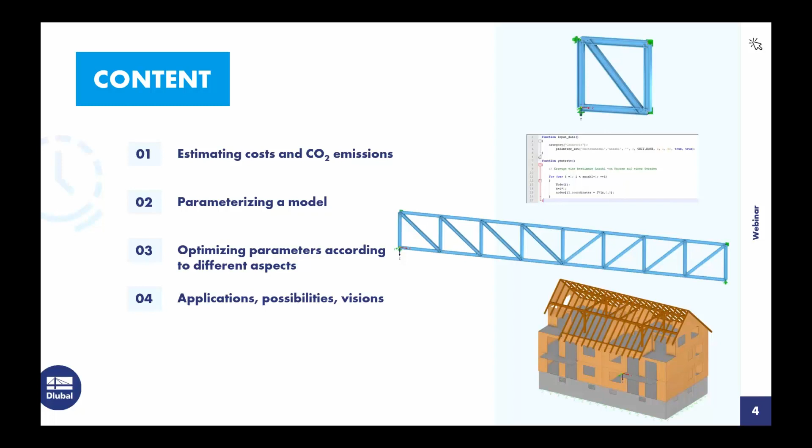And finally, we take a look at these cost estimations and CO2 emissions on a typical user structure, something like this apartment building structure here. So this is now the sign for me to change to the program, because I want to show you this live today. So I close this window and jump into RFEM, our new generation program.

And here, before we start with optimization and so on, we have to define a new model first. For this, I define a name, for example PO1, and specify my tasks. And when I speak about essential tasks, I always change into this register, add-ons. This register shows you all our add-ons available in the program: designs, analysis add-ons, special solutions, and here our focus add-on today, optimization and cost, CO2 emission estimation.

I agree, a quite complex name, but it should show you what it can do. And it also has a special place in this menu, because it's not allocated to special solutions or analysis add-ons. It's in the lower right corner to show you that it globally covers the design add-ons, but also the other add-ons. So it's lying like a skin over everything, because if you want to optimize something, you have to consider nonlinear material and also designs.

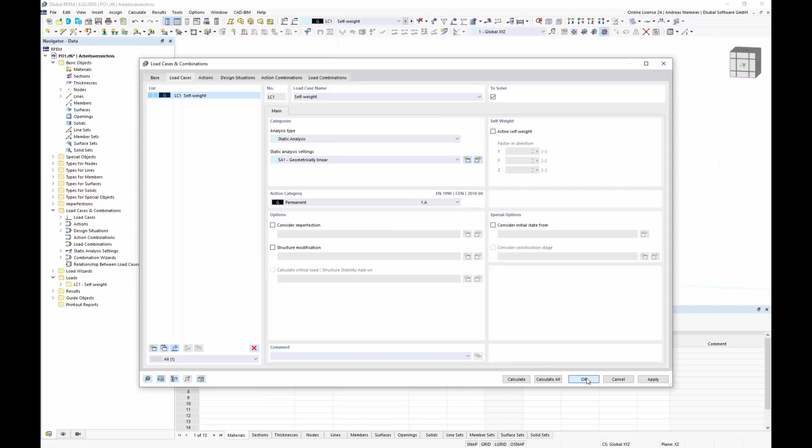And of course, at the moment I don't define here any element. There is no surface, no member, but I want to show you first which boundary conditions we have. So this means I want to load this element with a typical load, let's say with a unit load here. So no self-weight. I apply here only a nodal load, for example 100 kilonewtons, and this 100 kilonewtons should be carried from this element to 2 nodal supports on the left side.

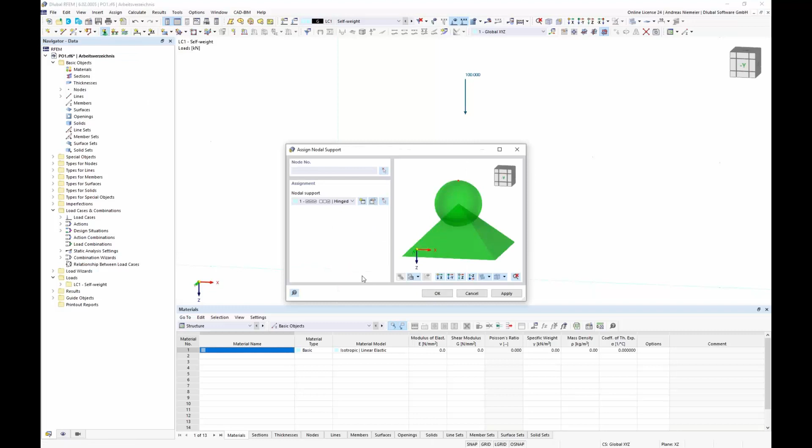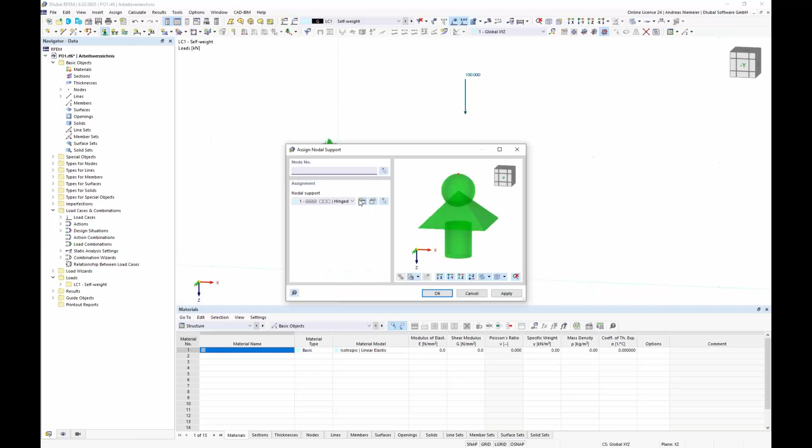So here the nodal support is on the bottom corner, a translational support in all directions, and on the upper side we make also a new nodal support, but without having any constraints, so I place it here. And so that this structure cannot rotate around the global z-axis, I place also here 2 supports in y direction. So these are my boundary conditions and should show you my target place where I want to operate now.

So if you see this load and you see these supports, our task is how we can carry this force down to these supports. I can create here now, for example, a wall or a member cell or a mixture of both or a solid. So everything is possible. But for explanation today, I use simple members.

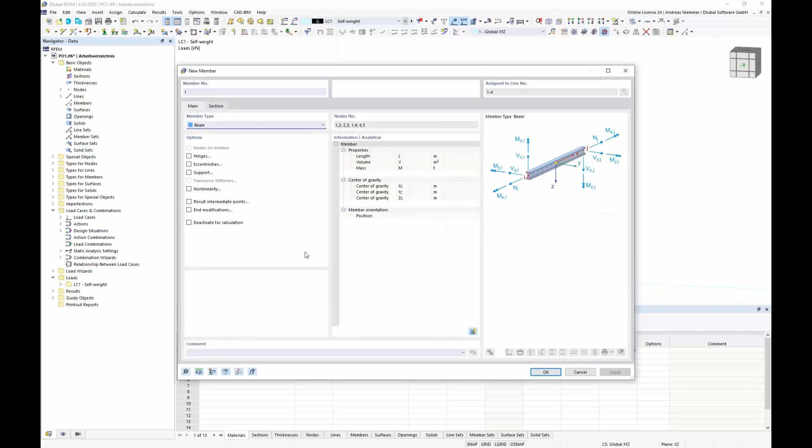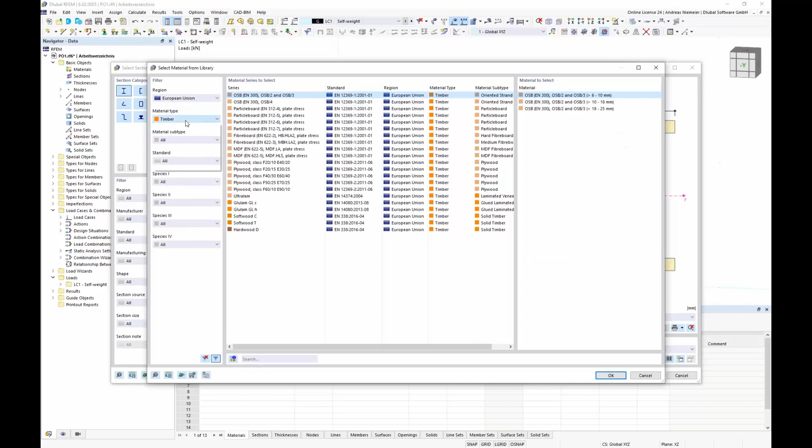So I select all 4 lines and assign a member here. So go to options, member, take here the member type beam and assign here a cross section. For such examples I always use my favorite cross section, an HEA 100, of course with writing a space here, and I select it here with a standard steel, so steel S235. So okay, after confirmation we get now these 4 HEA members.

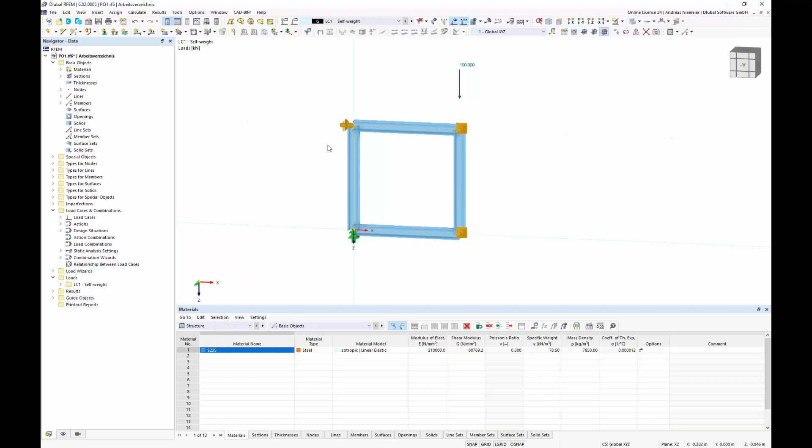They are connected rigidly, but this plays no bigger role here. It's only a structure that can carry the force down to the supports. This we can also check. So if I run the static analysis, you will see that we get here, of course, deflection. So we have here 14 millimeters deflection, and of course we get here internal forces, normal axial forces, here tension, here compression, and even bending. So we can realize that this shear is transported via bending to the supports and produces here reactions.

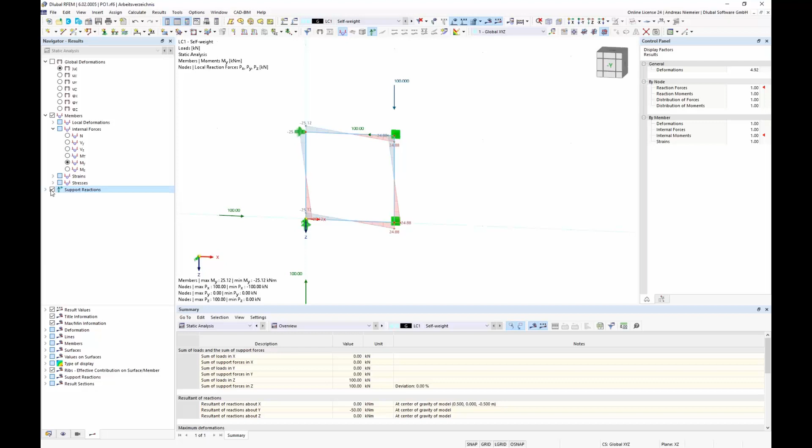So far everything is as expected, but as structural engineers, if you see this structure and even if you see this deflection shape, you would say, yes, nice structure, but we need a bracing in it. And I agree. I would also model here a bracing, but I don't want to tell the computer now what is the perfect place of the bracing. I expect from the computer that it will tell me what is the perfect place of the bracing, and therefore I say here now, please have here a bracing in the middle.

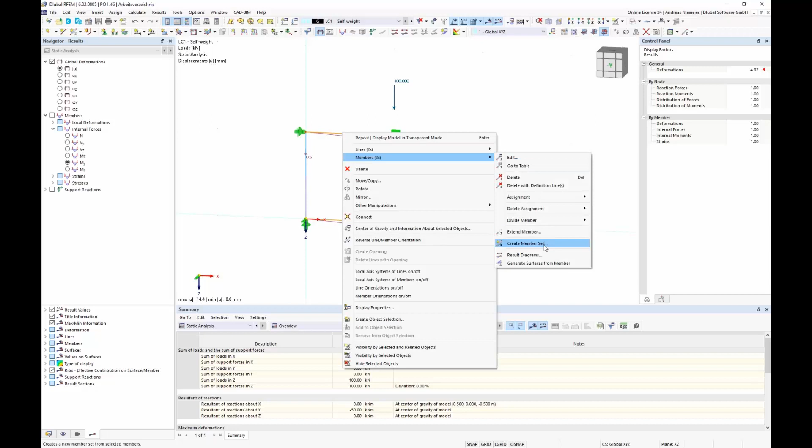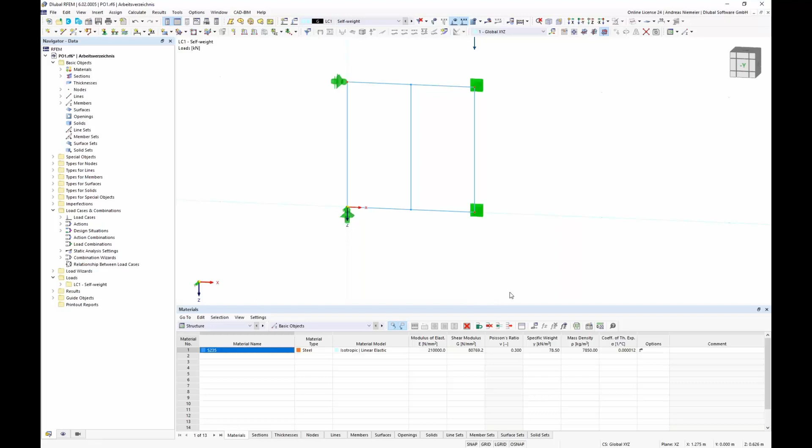So I divide the member with intermediate nodes, create here a middle node by placing the node on the member, and then I take here one leg and copy it here in the middle. So far we have now a bracing. I don't want to say now if the place or orientation is good. It's only a, let's say, stupid bracing.

And if we run the analysis again, we will see, of course, this bracing increases the stiffness, and we could reduce the deflection to, let's say, 8 millimeters, but the deflection shape is still the same, and we can think about the orientation or inclination of the bracing. And I would say now this is a job for RFEM, for the computer itself, so that RFEM can find a right place for this bracing.

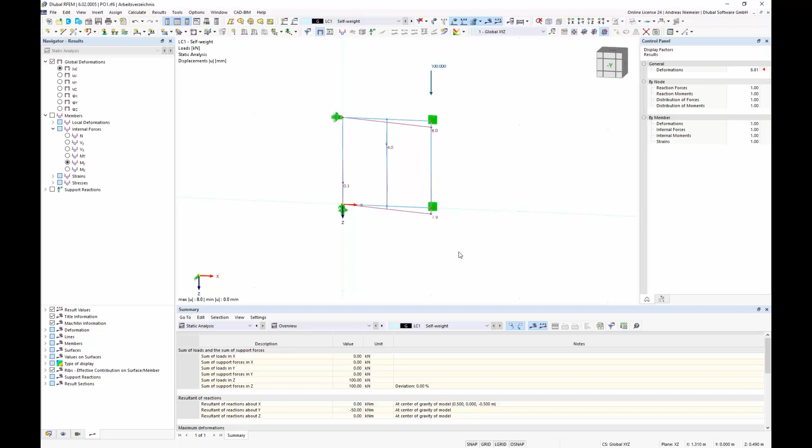We have to give the computer the information what it can change to find the right place. And here it's clear for us we can maybe move this node in the left direction or right direction here, and even here move the node in the left or right direction.

And if we define this variability, RFEM has an option to find this place. So first we have to specify this variability to start this searching process. And maybe you noticed it when I divided this member.

You see we have here red nodes, and we have here blue nodes. This blue node is a special node. It is a node on member and gets its place according to a distance from member start and end, but lying always on the member. So it means if I change here from 0.6 to 0.7 or the distance, the node will move. And this is exactly what we want.

And for this, I define two parameters. I go here to Edit, Global Parameters, and here I have a parameter list that I can specify, and I say the first parameter is x top, and the second is x bottom. The parameter gets the unit type length with, in this case, 0. Of course, I can write a value here, but I want to have 0.

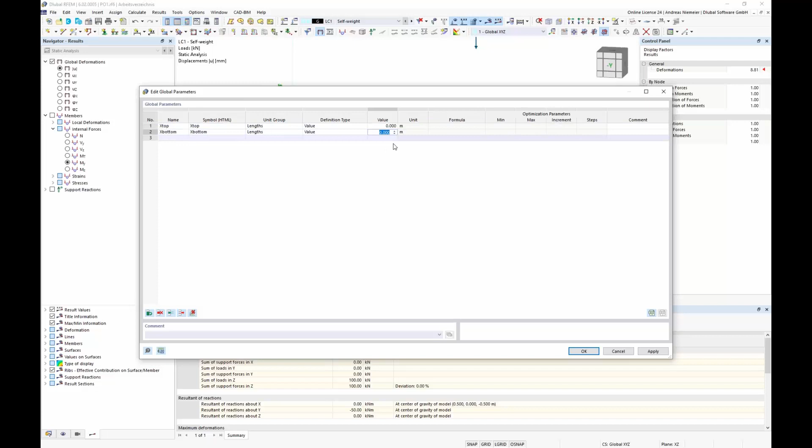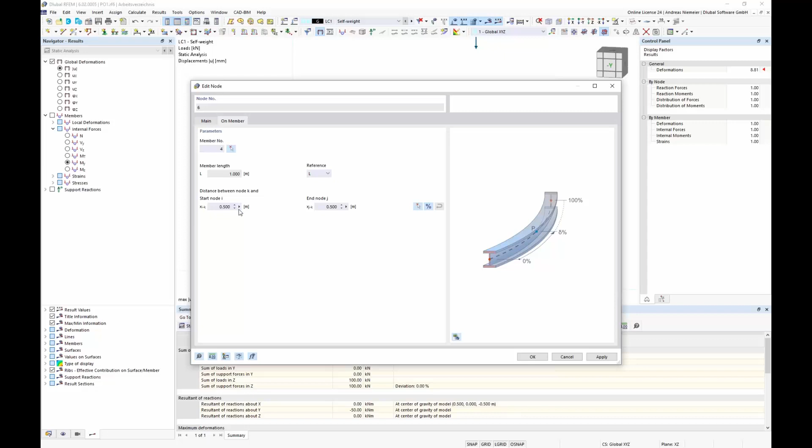And now I use this length parameter to move this node. For this, you go into the node properties, change here to length definition, go to this black triangle and open this formula editor. You have a big white box where you can write a lot, but we can say here 0.5 meter plus x top. And you see the program directly calculates the result. It's 0.5 because x top is 0.

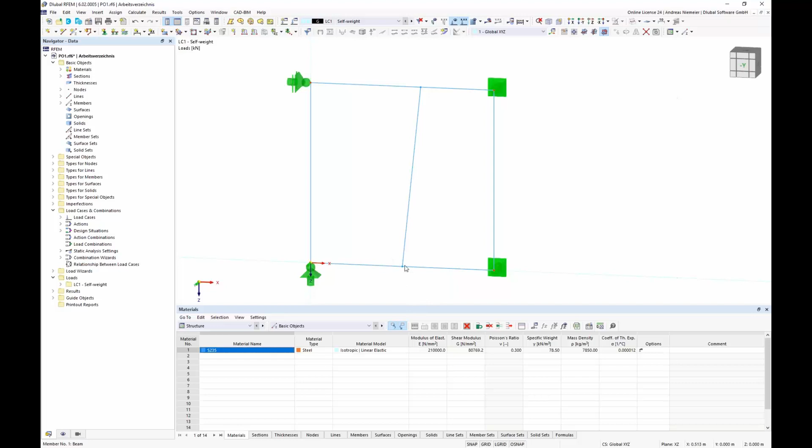But when we go now into this parameter list and change this parameter to 0.1, you will see that the program is moving this node. So we connected now the geometry to this parameter. The same we can do for the bottom. Here I want to go one step further. We wrote in this formula editor 0.5 as a fixed value.

But what happens if you move this node and it's not 0.5 but something else? To cover this, you can go into the node details, change it to length as before, and open it again. Maybe you realized we have two buttons here. The button with the i is an information button which gives you a command list you can use to connect to properties of the program inputs. This is JavaScript style and allows you to connect to every element of the program by JavaScript code.

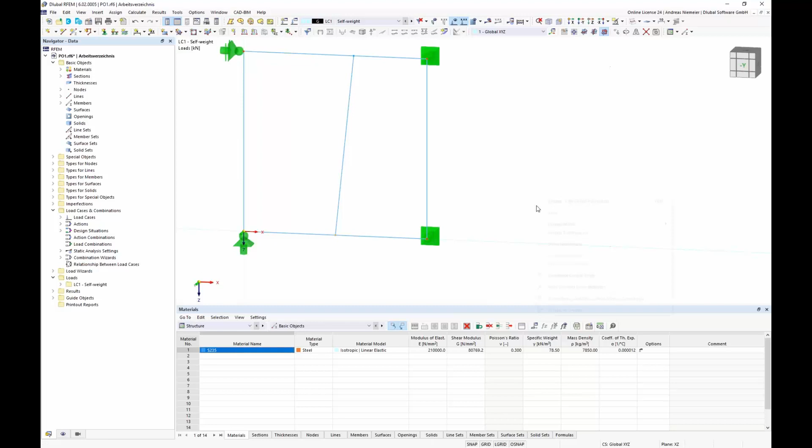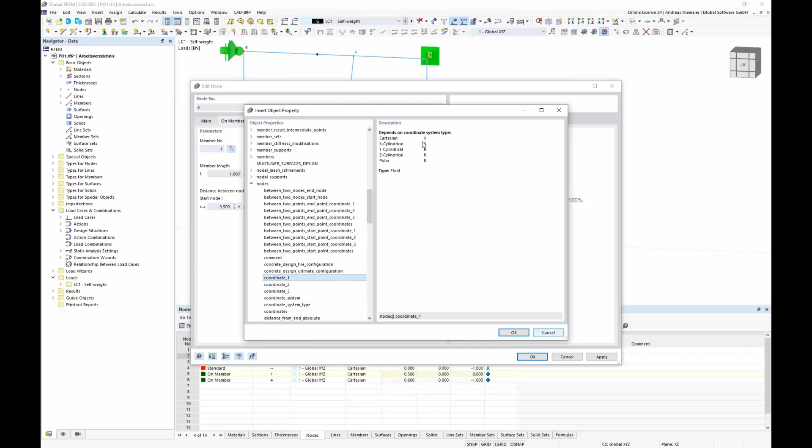For example, if we want to connect to the coordinates of node number 2, we can go again into this node property, meter, formula editor, and type n, nodes, and you get commands that touch the node, and for coordinate x you can connect to the x coordinate. If you confirm this command and write node 2, you get the value 1, which is written in the table, and you can divide this by 2, then we have a half meter plus x bottom.

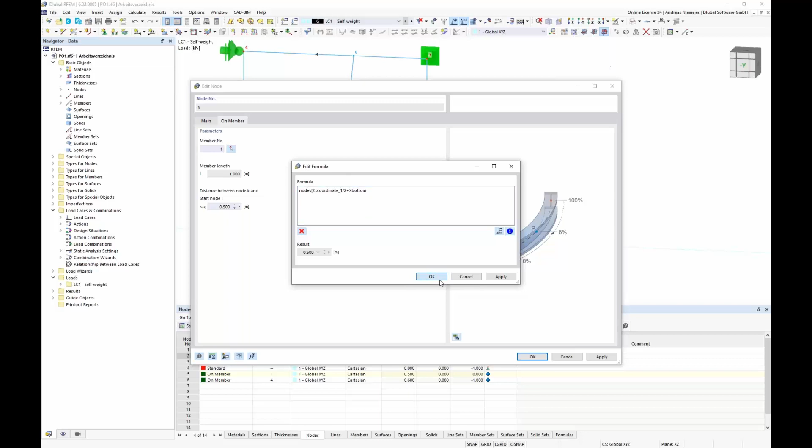So you can write your own code to work with values of the input data itself, which enables you to make a good parametrization of your model. Now we have an option to change this bracing member in both directions by typing in these values. Of course, this is not the optimal place. It's much more optimal when we move it completely to the right and left side. But this is the task of the computer later.

So now we have done this parametrization, but the question remains how the optimization can work with these parameters. The optimization we activated in the base data enables, below Calculate, the optimization settings menu. You see a few options and values to optimize. Unfortunately, this list is empty, because we have to declare which variables of the global parameters should be optimized.

For this, if you open the scheme again, you will see below the column definition type a few options. We have values, formulas, optimization, and some special types of optimization. If you give these parameters the type optimization, you will see it goes red. This means something is missing.

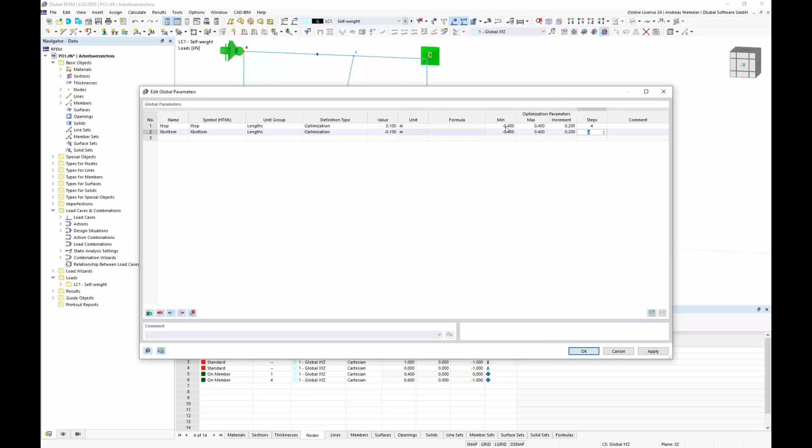And if we confirm this, and let's say we start here from 0, like in the beginning, and open here calculate optimization settings, you will see you get now these 2 optimization parameters available to optimize. Because we have these 4 steps, it finally ends in 5 states, and because we have 2 variables, it ends up into 25 different, let's say we call it mutations.

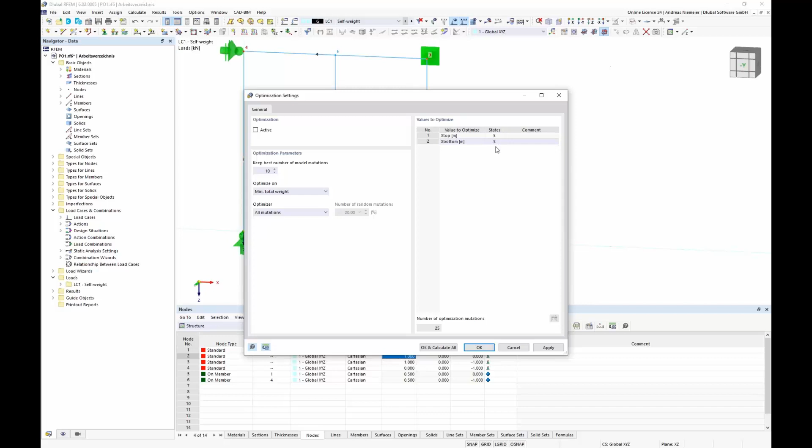Mutations means the value could have the first and here's the second state, or the third and the fifth state. So there exist 25 different situations, what means for us 25 different models where we have different geometries in this case. And we defined here the name mutations for these different models.

And now if we want to find the best solution, let's say best in brackets, we can maybe activate it here with this check, and you get 3 options to specify. The program asks us keep best numbers of model mutations, and here is written in standard 10. The question is best models. Of course, here we speak about 25, so it's not so crucial.

But you can also work with 1 million, then you don't want to read 1 million. So it's interesting only to store the best 10 results. But for our upcoming analysis, 25, we can write all, only to understand what happens. Then, because the word best cries to the question, what is the best? And here we have to specify below the chapter optimize on when the program is changing these variables.

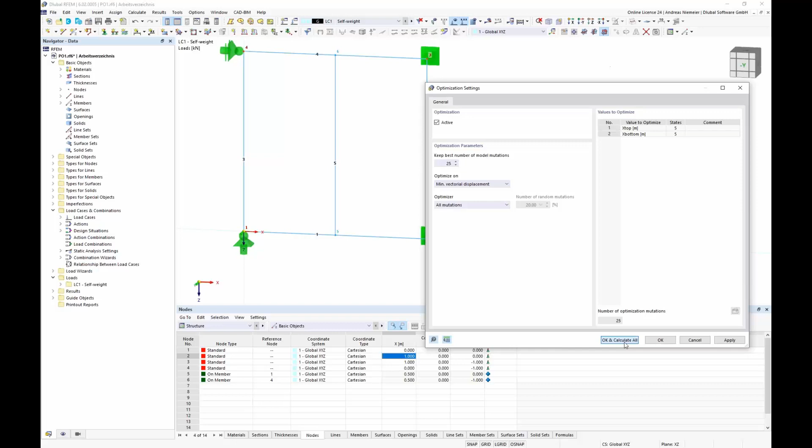And if we do this, and start here OK and calculate all, the program is opening a calculation process, but it's looking a little bit different. It's more an optimization process where you see which optimizations are done. And in background you see what is changing. Yeah, he calculates the different mutations, and even if he finished the calculation of one mutation, he logs it down in the table connected to these 10 best results, for example.

Now we log down the 25 best results, and you see you have here measured the vectorial displacement and the corresponding parameter set. The best vectorial displacement, for example, here happened now with the solution number 5 if he moves the top node 0.4 meters right and the bottom minus 0.4 meters left. So this is, let's say, our expected place, what is really good. All others are not so good, so you see we get here bigger deflections. But of course it's a stupid process because he calculates all available.

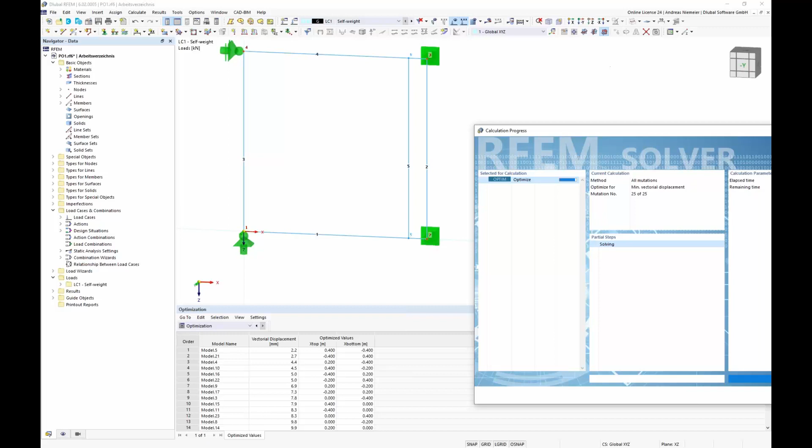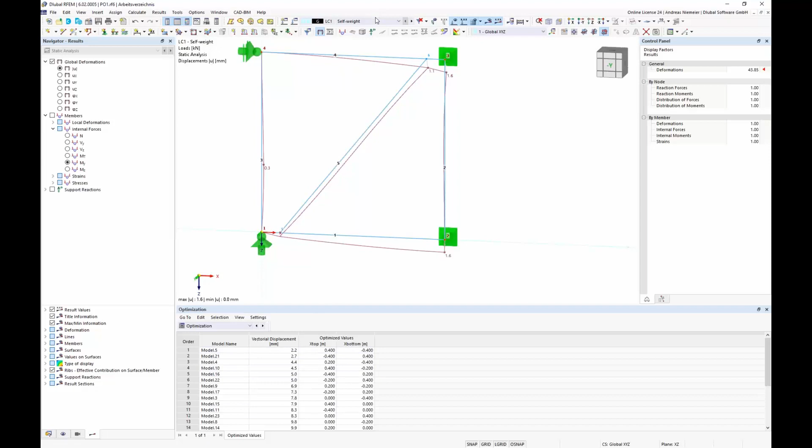use all values. And what I want to present to you with this step now is that you have to wait for at least the calculation of 25 models to get a result, to find out that maybe model 5 with this parameter layout gives the best result. We have here 2.2 millimeters, but this is only coming because the program is directly considering this design situation with increased values, where he has this, let's say, partial safety factor, because when we calculate this, you get exactly this 2.2 millimeters.

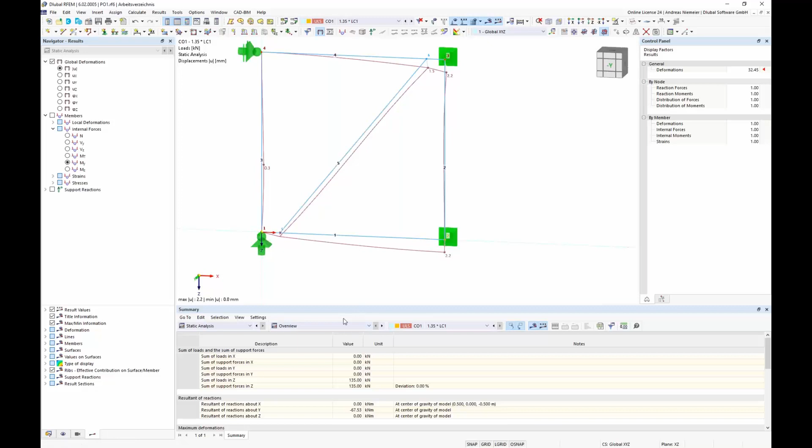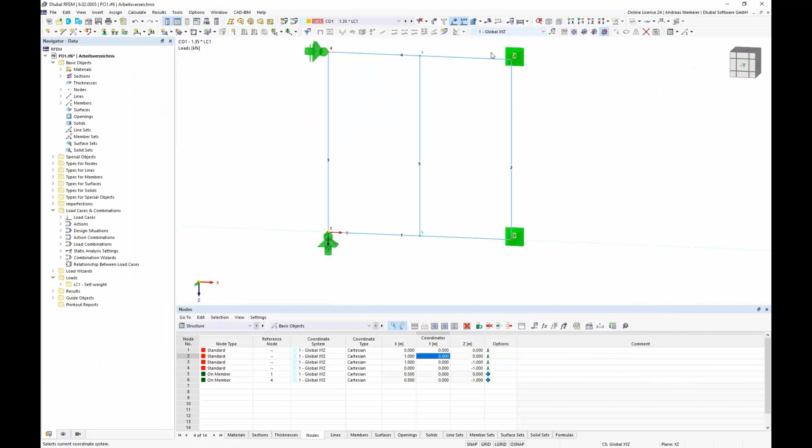So now, the question arises, can we do this faster? And yes, we can do this. So we set this structure back to its original place. So this is the best parameter set he found. But we ask the program again to find this solution much faster with a learning process.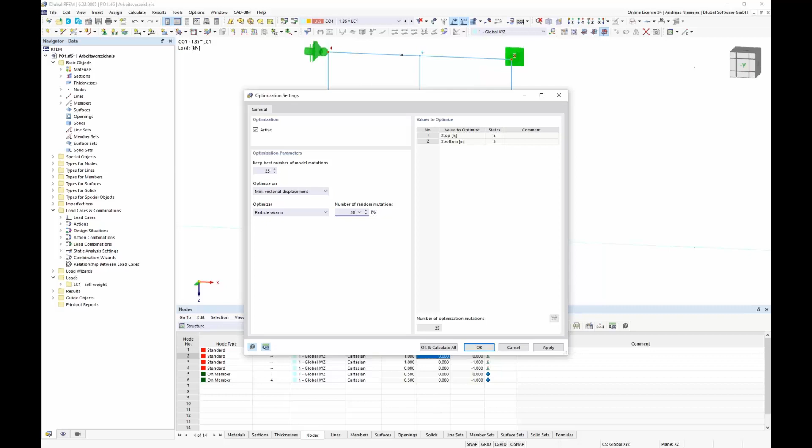And here we go back to this menu, optimization settings, activate it again, and say now, please use as optimizer this particle swarm algorithm, which is, let's say, a learning process using only a fraction of all possible variants or mutations. So I say, as a basic input, for example 30%, which means 7 elements of all, and the task is now to find a good result within the calculation of 7 mutations. And for this, I start the process now.

For this, he has to start with a random selection of, let's say, parameters, do its calculation and realize, okay, my first calculation gives a not so good result. Then he tries to find a better parameter set by knowing what gave him a bad result and finding a better deflection until, let's say, 7 mutations are over. So his game is to find a good solution within the 7 solutions.

And you see now the program was able, by using this self-learning process, to find within the calculation of 7 models a really good solution. Maybe here he already found the best solution, but this is not a must-have. The point is more to find as good a solution as possible, but you can save time with this process because he learns, maybe when he first starts with such a solution, that he has to change the parameter to get a smaller solution, and then he can learn not to increase the value in this direction but rather to increase it in this direction.

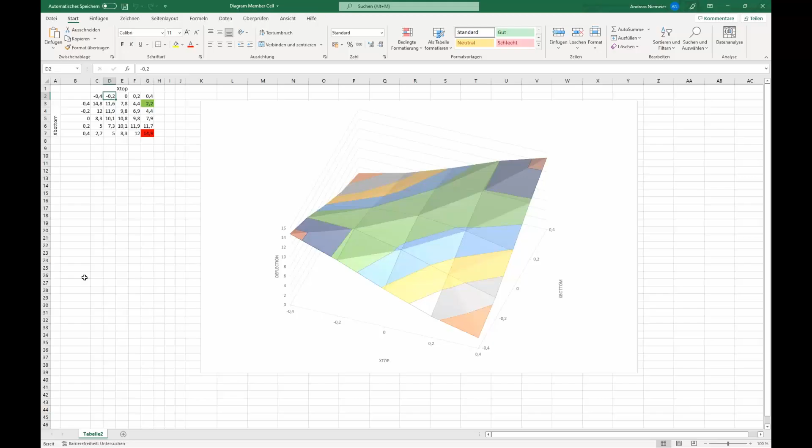And because these swarms have a need to rest, maybe in reality, and the closer they come to the resting place, the more the need increases, mimicking this behavior helps to find these optimums here in this corner or this corner. So maybe we could prove this a little bit with this short introduction.

And now I want to open this topic by mentioning what we can use this for, because if you take a look at this cell, it's part of a truss girder, for example. And now the question could arise, if I think of my life as a civil engineer, if you try to use a truss girder for supporting some loads, maybe the question appears, how many cells should I have? Do I need 10, 20? I don't know. Then I can change the height of the truss girder. It's also unclear, and even the cross section, for example.

What is always static or fixed is the length and the load. I cannot change those so easily, but what I can change is maybe the geometry of the truss girder. But if you take a look at this current parametrization, you will see, yeah, nice, of course I can use it for truss girders, but this technology only allows me to change the length and not the number of elements. And I agree, this is not possible here, and this is maybe the stuff of our old generation, RFEM 5. But with RFEM 6, we got a new mighty

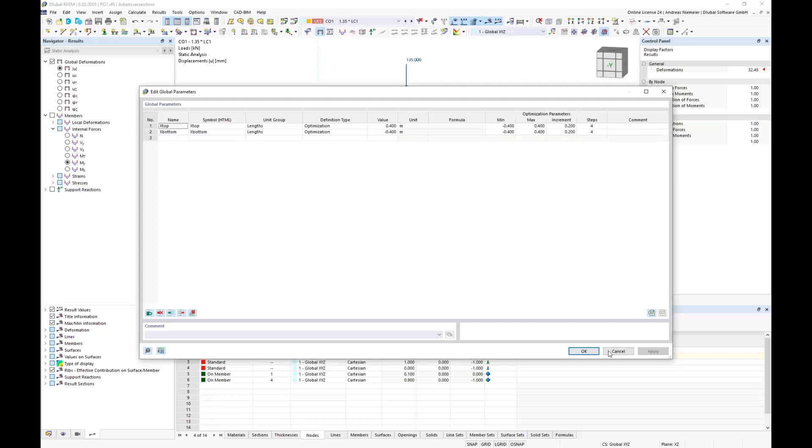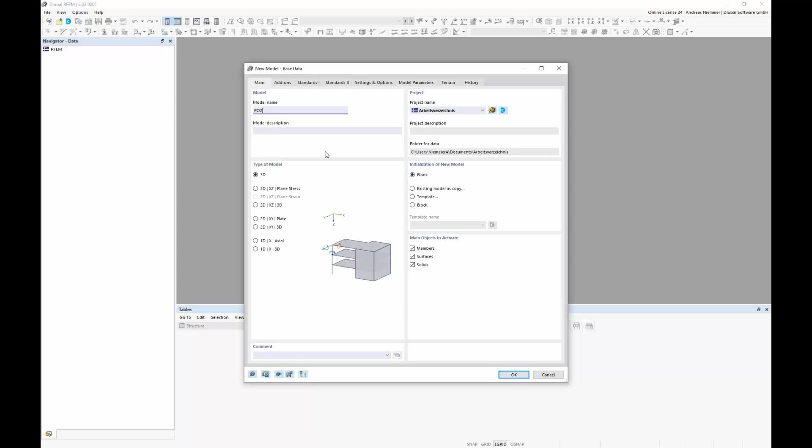We got this, let's say, JavaScript technology, what I just showed you before, where I can write per code elements. And I want to open this case here by opening a new model where we create, maybe here PO2, or not a truss girder, but more, I want to show you how you can create new elements by a parameter, which represents our task for a truss girder, because in a truss girder you also have to say I need 5 cells, 10 cells, which means more members or less members.

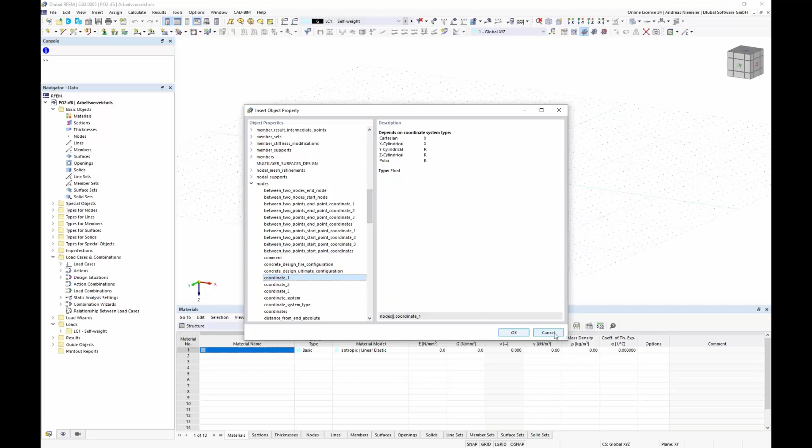And I want to show you now with the next sequence how you can control the amount of elements by using all these functions in the program. And here, as mentioned before, we have in RFEM 6 this JavaScript command catalog where you can connect to any element in the data block. And additionally we have here a script manager which allows you to store this stuff.

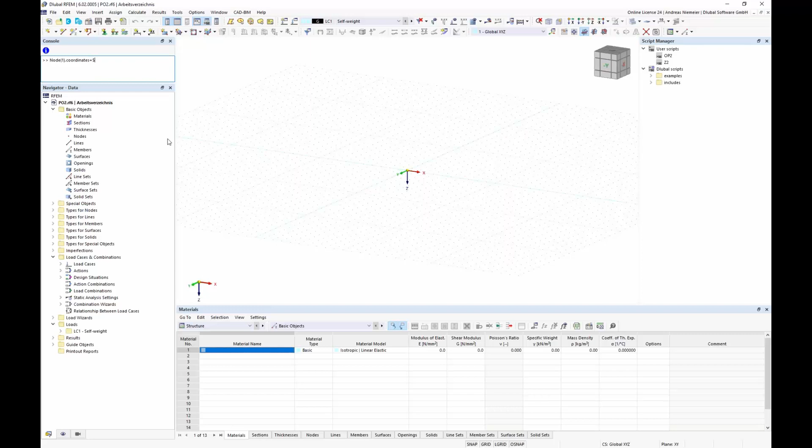How is this working? At the moment it seems quite cryptic, but for example, we want to specify a new node. So we can write in the console, first checking the command for it. For example, we want to create a new node, here in parentheses, node 1 dot coordinates, and the coordinates are a vector at 1 meter, 1 meter, 1 meter, for example. So with confirmation we can create now a new node at 1, 1, 1. So this is possible right now.

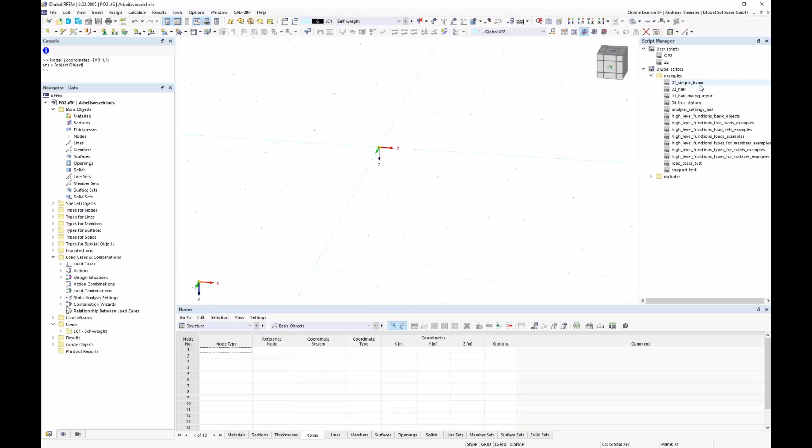You can define new elements on this console. Not only a node, there's more possible. If you look in the script manager on the right side, you have here, for example, a simple beam. If you double click on the simple beam, you get miraculously a new simple beam here with supports and loads and so on. So you can even create complete models with this technology.

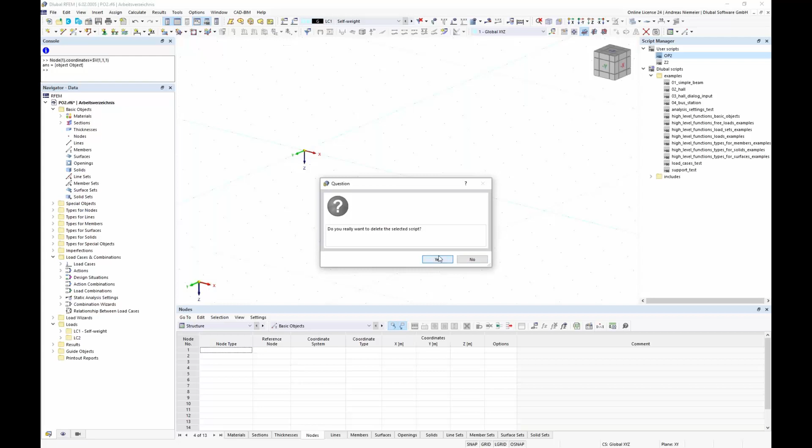Let's expand this topic: how you can create such a script, because here we only used the console. So I copy this command, Ctrl C, and create a new script. This last one we delete, and make a new script. We call it PO2. Okay, and then we can open it with an editor. I use this Notepad++ editor, but you can use any editor you want. It's only a JS file, and here we can write comments.

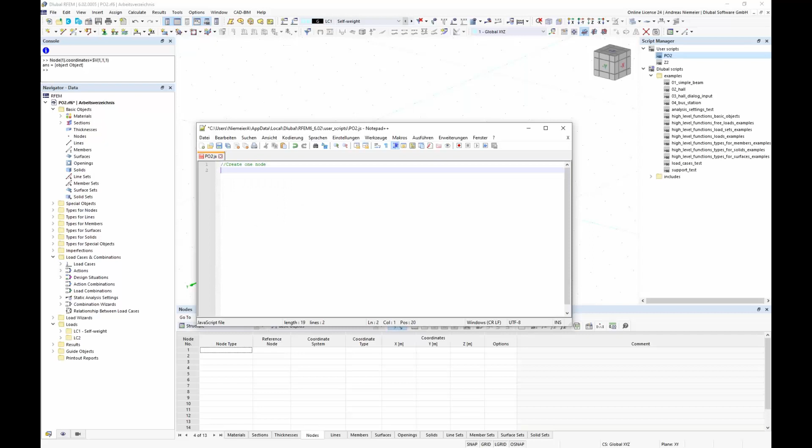For example, create one node, and I insert what I just wrote into the console: node 1 coordinates and so on. And I store this and double click PO2, and you will see you get this node again. So here you have the chance to write down what you want and store it in these scripts. So not so crucial, I would say.

Now back to our idea. We want to create more elements at once. How can you do this? I delete this again, open my file and write: create more nodes on one line. How to do this? If you work with more elements, you have to write, for example, a for loop. For a running variable, for example variable i, which is 1 in the beginning, it should run while this variable is smaller than 5, and increase i always by an increment of 1.

So in this running loop, it should do something. It should always create a new node with the number i as it increases. Then it should create for every step an x coordinate. X is, for example, i multiplied by 1 meter. And it should move this information as a node into the node table. So write nodes i, dot coordinates,

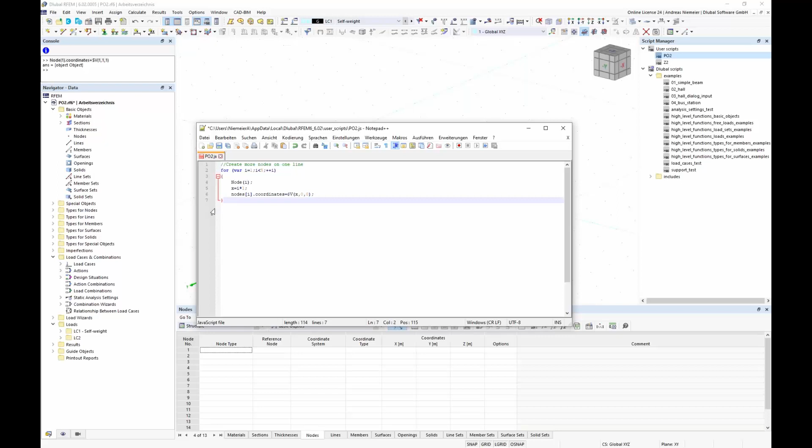and as vector again, $V, and here we write x coordinate, comma 0, 0, so that we have nodes on a line. And then we can close this command. The rest we delete, we don't need it anymore, and we can store this. And if we run this again, you will see, if I made everything right, we get a few nodes in one line. Because we stopped before 5, we get only 4 nodes.

If you say now, I want to have control over how many nodes, for example comparable to how many cells, we open it again. No big deal. We write: create a specific amount of nodes on one line. Here we have a parameter, variable amount is 7 for example, and then we use this amount here in the loop, amount plus 1, and if we do this again and delete these nodes, we get 7 nodes as written in this parameter.

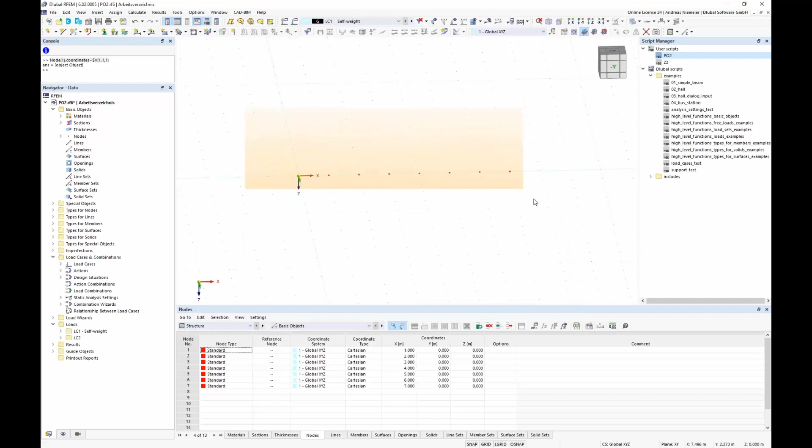Not so crucial. The only point is now how we can connect this parameter with the optimization here in this menu. And this you can do by using blocks. If you see here our blocks in the block manager, you will realize that we have here blocks for RFEM, different types, and if we open one block, you see it will create some structure.

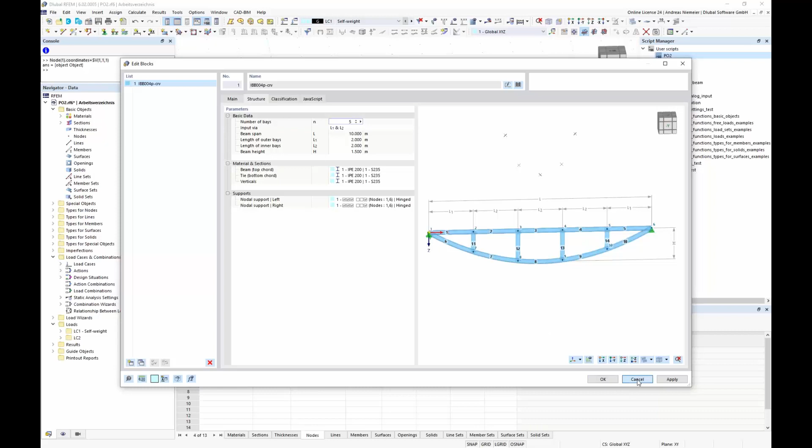It also has here in the back a JavaScript code with, let's say, an input where we have these black triangles again where we can define something. Yeah, and now we only have to take our code with these nodes and move it into this block logic. This is not so big a deal. It's only that we have to write here in the front that it should generate something. So we need here the keyword or the function, function generate, and make here a curly bracket again.

So nothing more. And now we have to store this file here. I prepared a folder for today's presentation below my temp folder. And now I say in the program, please save this file as block, maybe name PO2. It should select it here below for beams, for example, and I use this JavaScript file below temp2. And if I confirm this, the program is taking over this JavaScript file as block into our block manager.

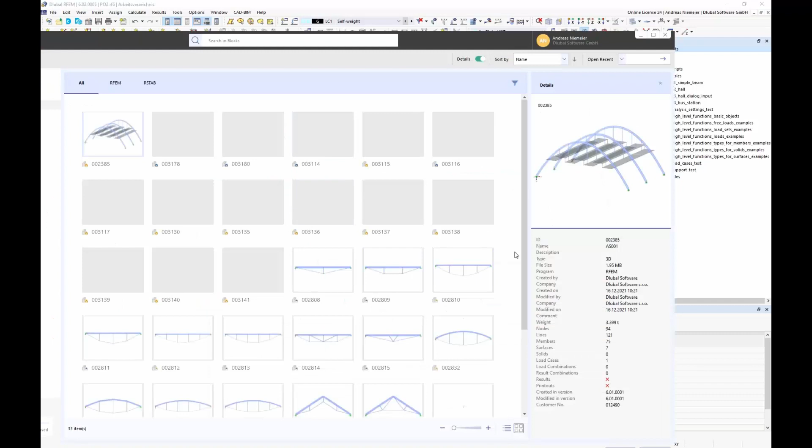And if we open the block manager again, we will get this block here. Let's search here PO2, and you will see we get here our nodes, 7 elements. Here's our code, everything clear. And now let's connect it, and we see we have no structure. Yeah, because we don't define it. It's clear. But now we do the last step and connect it with input.

And for this, you can open it again here and add, let's say, an input block. We say here function input data, open here a region, and here we write down a header, for example, category geometry. Of course, all commands I'm using here, we have a documentation we can send you afterwards. Should not be the deal. I only want to show you how it's working in basic concept. And below this header, we want to specify a parameter.

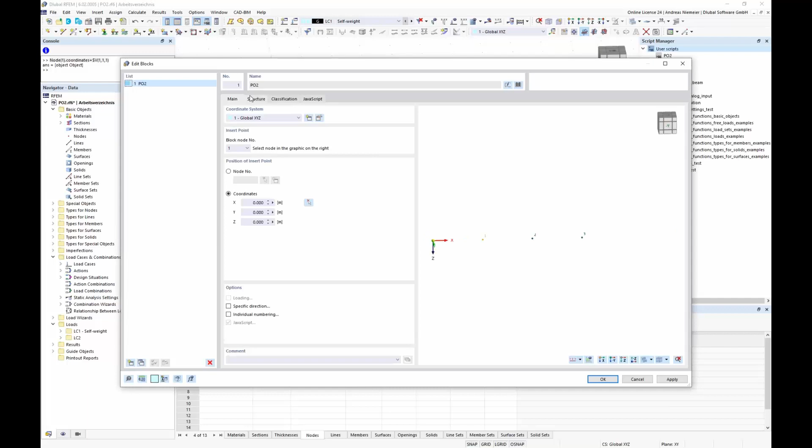And now we close this region and delete here this fixed value so that we can connect this with this here. And if we save it and save it again as block, oops, save as block, PO2, category, for example, beams, and again our PO2 script file, and okay, we want to replace it. You will get here in the block manager below this PO2 our 3 nodes, and you can change it here to any value.

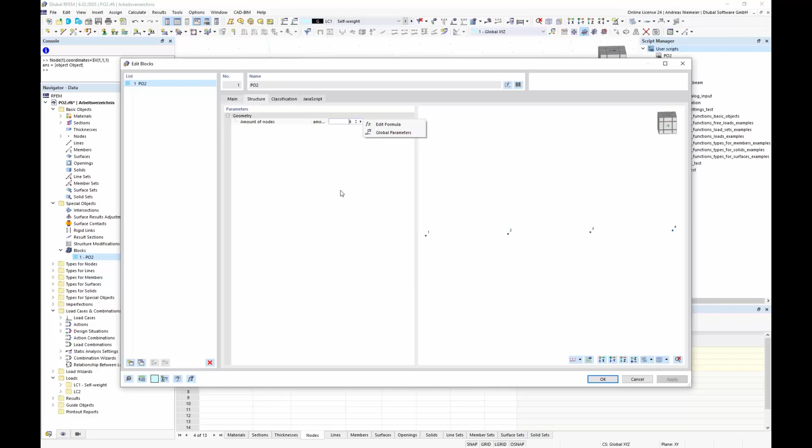And now we take it over in the program, and you will see that you can have this block not only as simple nodes but also as compound elements below special objects, where we have this PO2, and we can connect here any parameter from the parameter list. So with this idea, we go back to our truss girder and use it. So we delete this again and use now a predefined file for a truss girder with members I prepared for you. And I save it as block, Truss girder 2, for example.

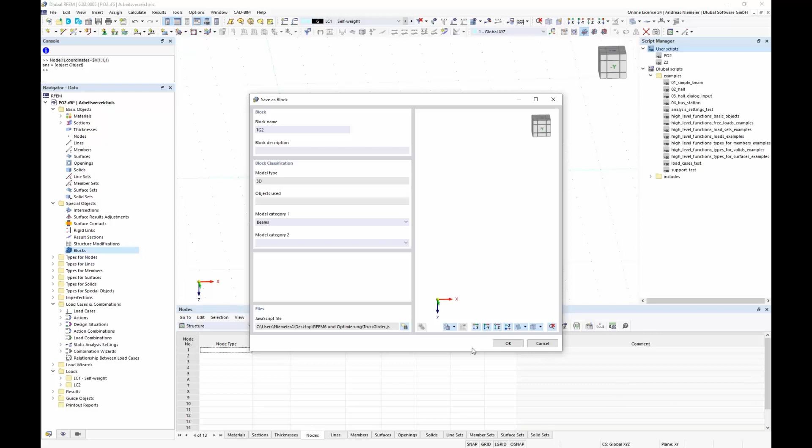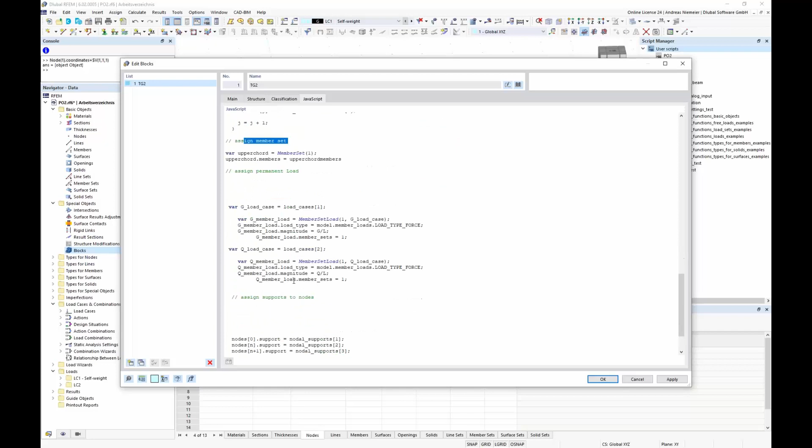We place it below beams, and I have here a file, truss girder, prepared, which is not only modeling nodes but also beams and loads. And if we read in this file as block and get this block here, tg2, then you see we have now here a block which writes us an input file, function generate, nodes, member sets, loads, and so on. And here we can now specify we have 8 cells, we have a span of 20 meters, and we have a height of 0.5.

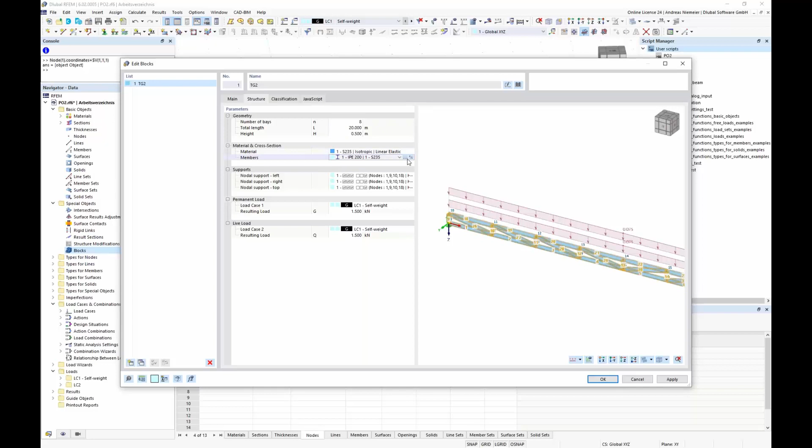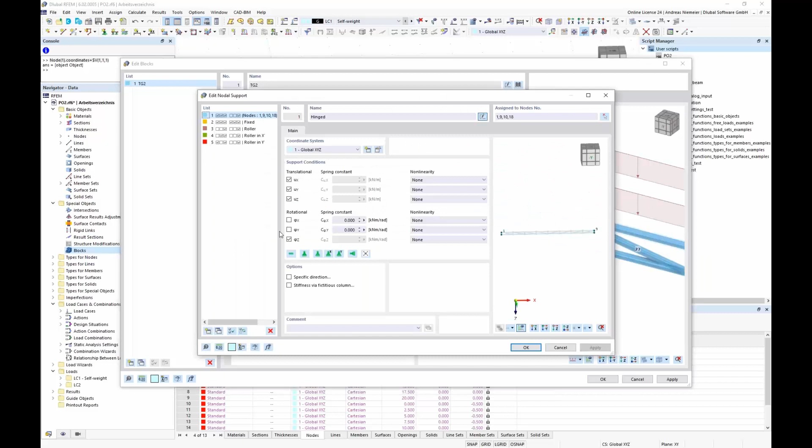It should start here with the material S235 with our favorite cross-section, our HEA. We go here in the library, HEA 100. We can specify initial supports. Here on the corner we use, let's say, a rigid support in all degrees of freedom. The other is maybe without constraint in x3, and the last supports so that it doesn't fall out of the plane.

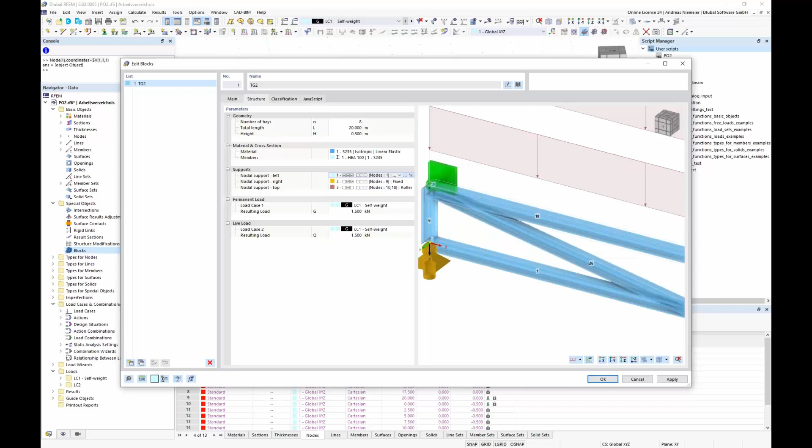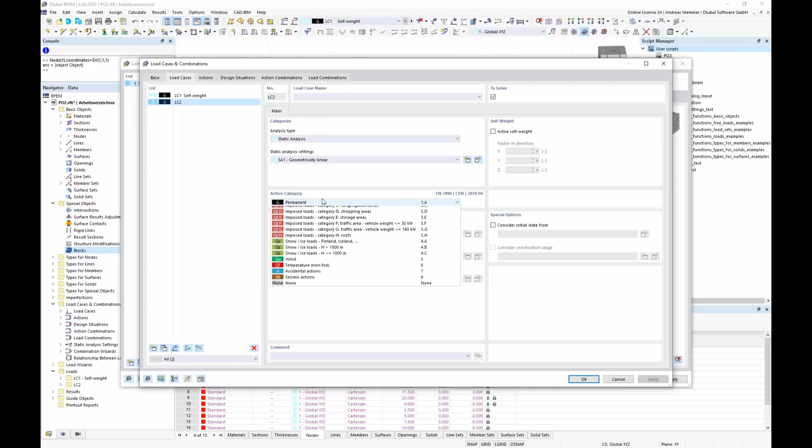So we have here node 1, node 2 and 3. And we have here also a clear support, and for the loading I defined it so that we get the sum of loads. For example, I have to carry 100 kilonewtons, which will be distributed homogeneously over the full length, and as load case we have a self-weight and maybe a live load or imposed load, and here we have to carry 200 kilonewtons.

And with confirmation of these inputs we get here our truss system with 2 load cases, and now we can connect it to the optimization. So we connect here our optimization. We specify here our parameters, for example cell, which is an integer value. So we go here to model integer and write here, for example, 4, and because it's an optimization variable we say it should run from 4 to 10 with an increment of 2.

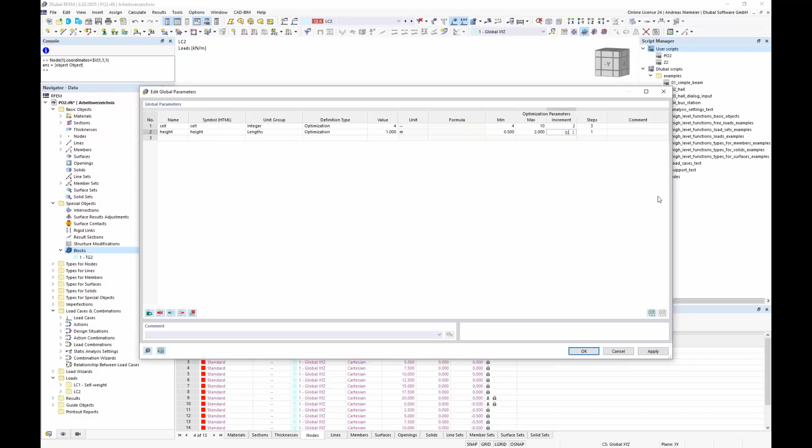And again we have, for example, also a height parameter. Here we have a length parameter which we set to 1 meter, and it's an optimization variable where we can say please run from 0.5 to 2 meters with a step of 0.5. And now when we use these global parameters, optimization parameters, in the variable block and connect it here with these inputs, formula editor, cell, and height,

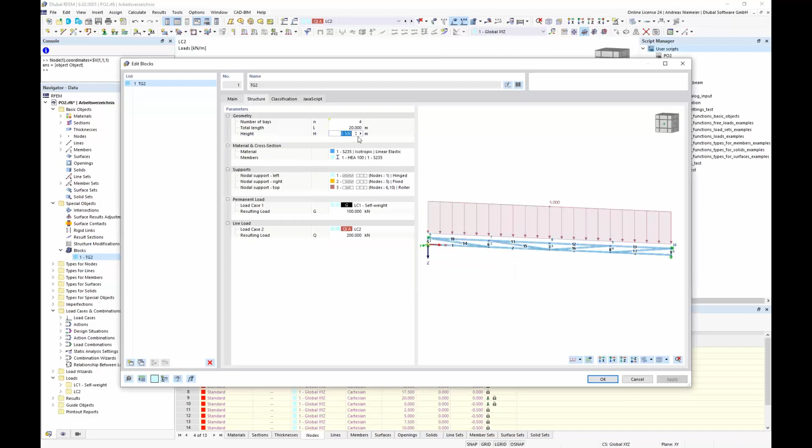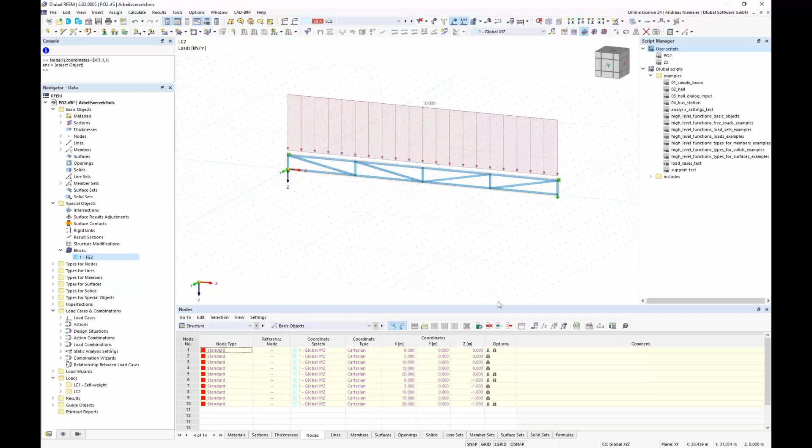and confirm it, the program says you have to modify the geometry behind, and you see we have now connected these global parameters with the block, and it uses the code to change the structure, not only the structure length but also the amount of elements. And of course if we calculate now the structure, for example also with stresses, the design is not important. Only when we activate it will it be considered.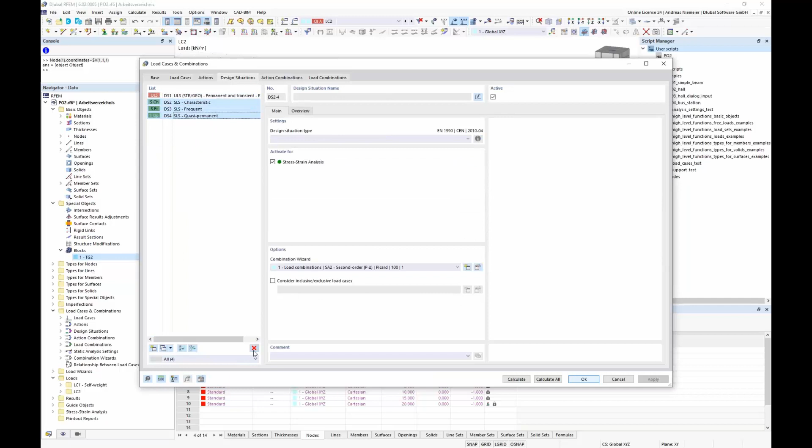So if we say, okay, you have here this combination, so it's not taking so much time I reduce this serviceability, and say here we use only linear calculation and calculate all, you will get the result, deflection result and a utilization result. And you see we get here a deflection of almost 300 millimeters with a utilization of 5.06. And this means we have to get a better layout of the structure for a good structure.

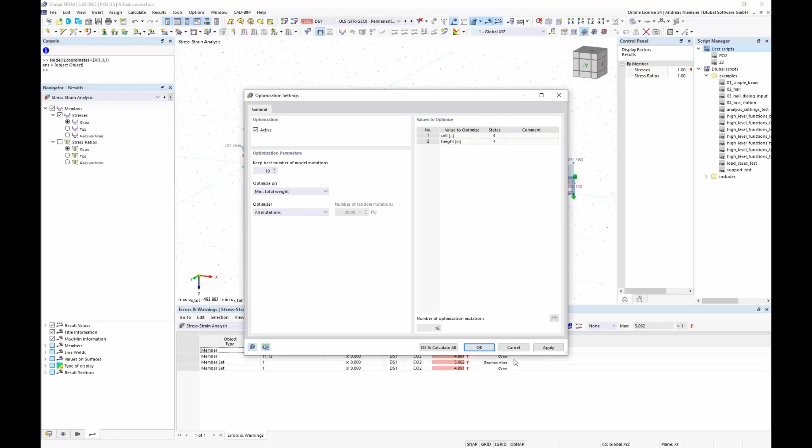And now if we run the optimization process here, if you check here, you see we have at the moment only the cell and height parameters, and the question arises how I can change cross sections and how I can, for example, optimize according to cost. You have to specify here below section, edit the optimization. So if we check this, the program knows it should optimize all HEAs in one row.

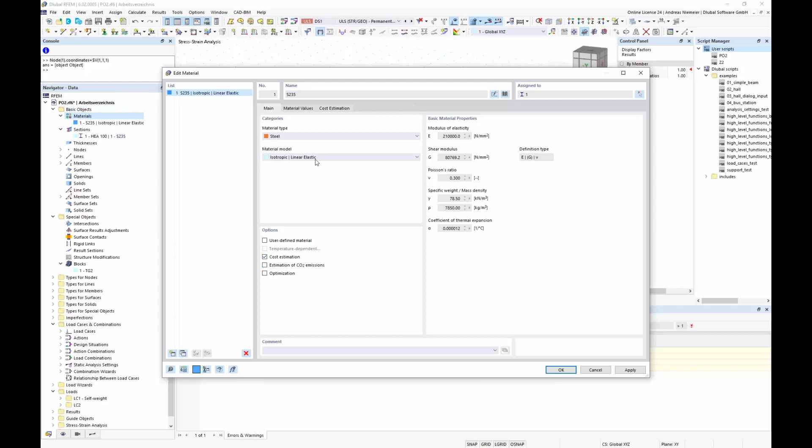And if it should optimize according to some costs, you will see you get here below the materials the option to activate a cost estimation and an estimation of CO2 emissions. And if you go to cost, you see you get an option to estimate for solids and surfaces, which we don't have, and for members we can say the weight of the member is, for example, 1,600 euro per ton.

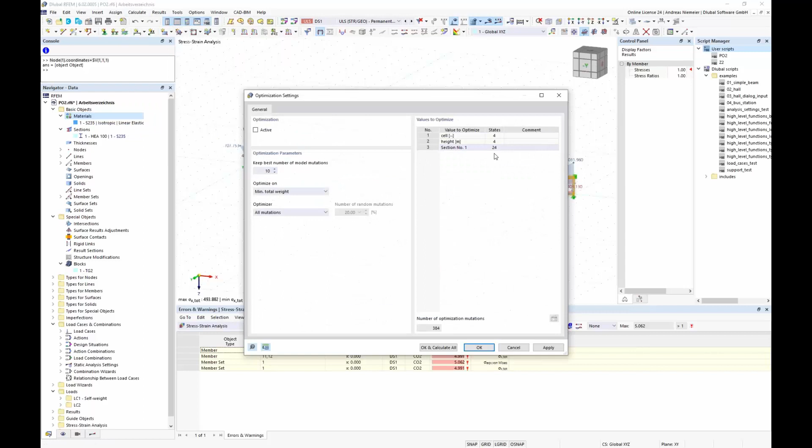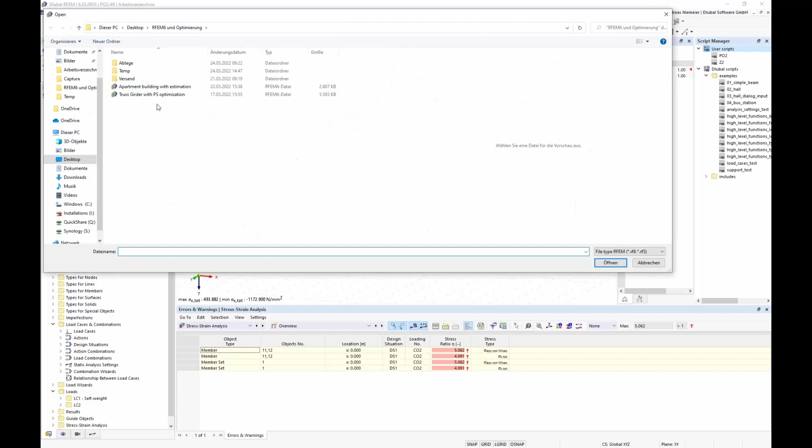And now if we go back to our optimization settings, you will see even the section appears now as a parameter because we activated it here, and this ends up in 384 mutations, which takes a while to calculate. So we should only work with a fraction and use a particle swarm. And I don't want to start the calculation now because I prepared it with final results, because I don't want to wait for the calculation of these mutations.

But with calculating 40 elements of these 384 possible solutions, you get here a list, and you see the optimization result is playing between 40,000 euros and 4,000 euros. So, let's say, those with HEA 1000 are uninteresting. But if we take a look at this fraction here, you see with 10 cells and a height of 2 meters a HEA 160 is interesting, and with 8 cells and 2 meters a HEA 160.

And we are playing here, maybe we can reduce the amount by 400 euros or by, let's say, 1,000 euros. So there's a game to earn money only by finding good parameters. And this is, I think, a quite interesting topic to save money. So this is not only to optimize, as you just saw, coming now to my next point about these estimations.

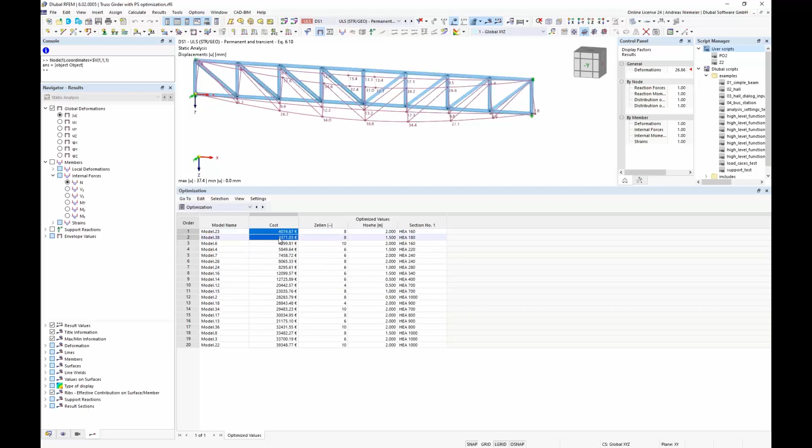These estimations, I prepared here a next file where you see you can use them not only for optimizations but also for other topics. So here I have a structure, a typical 3D model from our users where we have some organization below.

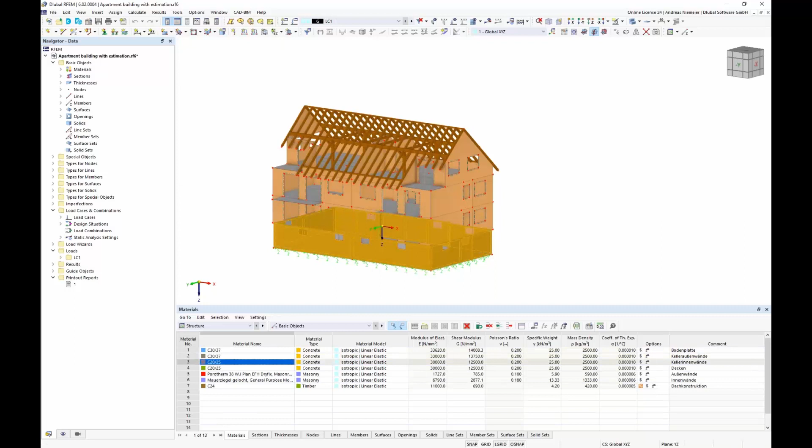Where you see he organized maybe the slab, maybe the outer basement walls, the inner basement walls, the outer slabs, the outer clay brick walls, the inner clay brick walls, and the roof construction.

And if you need it now for optimization tasks or only for emissions or estimations, you can use this option from this add-on, because here, for example, if you only want to estimate costs, you can activate this cost for all materials and define for every type of element what should be covered or not. So you can decide if it should only account costs for surfaces or solids or members, or even for

surfaces for volume, and maybe for top faces if you have some finishing or some painting on it. So you can specify here some basic costs to get finally an amount of money, what the cost is about, for optimization reasons or only for some

calculations. And in this example I used this logic of the basement and floors and roof and specified here different parameters. I defined here euros per unit, and so I can estimate the total cost of 200,000 euro for these elements that I modeled. Of course, the height of the price depends on what I input, but it's in your hands here, and I think you know it much better than I.

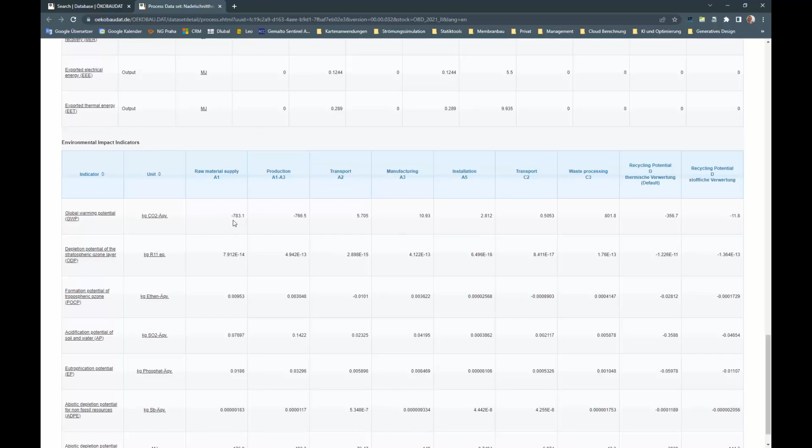I can change this also to English, where I can search for some materials, for example here timber, and you get here for timber, according to this indicator global warming potential GWP, the CO2 equivalent values. And what is quite interesting here, concrete and all others gave us positive ones, but timber has negative ones. And this is maybe what makes it interesting regarding optimization,

because here I can also consider negative emissions. Generally, if you do optimization it should always result the same whether you use it per weight or per price or something like this, but regarding sustainability and with these negative values, it could be interesting to optimize, and the program can find a solution with more timber, which is much better. So you can control it here with this stuff.

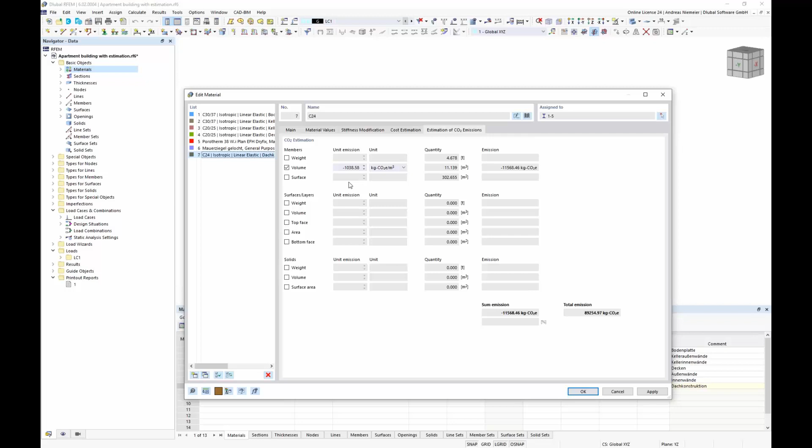Yeah, so you get with this add-on two parts: optimization and cost and CO2 estimation. In one part you get the optimization, which I just showed you before, and these sheets in material to estimate the cost and CO2 emission. But of course, as mentioned before, if you optimize something, you can rely on these figures here in this menu.

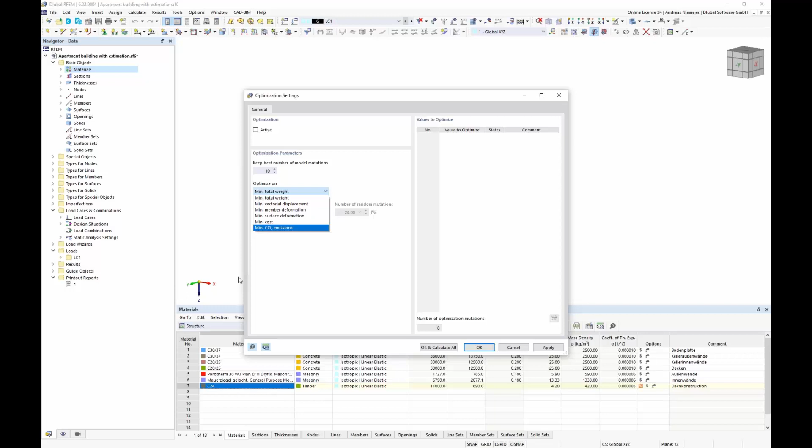So now I'm coming to my last point to close this webinar. And here I want to speak about our vision and the possibilities of this add-on, because it's quite special. And maybe to sum up what I showed you today.

Today I showed you that you now get in our program environment an optimization machine, call it like this. And this optimization machine can find good parameters, and these parameters can be defined by yourself in your structure. Of course, you can modify or parameterize your structure by changing length parameters or load size values. This is quite easy and was the first thread that I showed you.

But as mentioned, with the new generation, you get the option to specify inside the program a JavaScript code which can connect all these inputs and can create new values in these tables to grow a new structure according to some parameters that could be optimized.

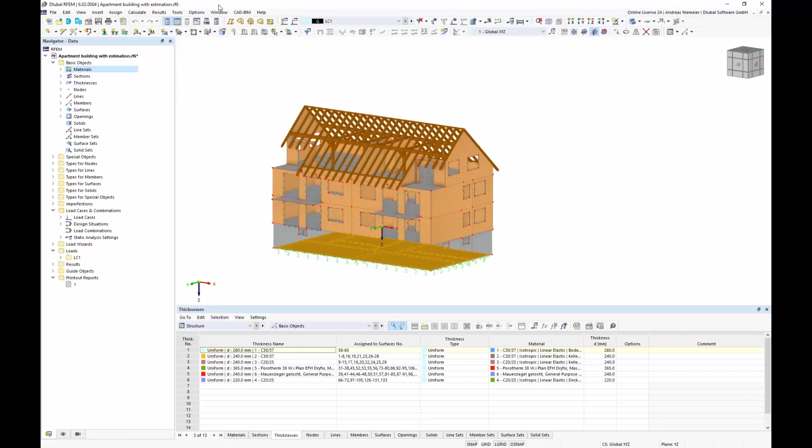And then a third stage, which I didn't show, is that you can also create from several RFEM models, so from more windows like this, one big structure, and connect it via our web service to this optimization tool. And I think all these three options give you a really mighty tool in your hand to find good structures for your work.

And maybe an easy idea how you can start with such tools is, for example, if you imagine you have a steel hall or a timber hall, you can use this program to find a good distance between your frames, or you can use it for finding good distances of supports of continuous beams.

If you want to use it more advanced, you can use it, for example, to decide if you should use a frame with bending moment resistant frame joints, or if you should create this frame by cantilever columns, or as mentioned just before, you can use it for deciding if you should use timber or concrete or aluminum or whatever, according to different reasons, maybe CO2 emission reasons. So you have all these options, and this gives a lot of possibilities.

In our case, we have the vision: what happens if we let the program decide how the structural system should look, and we create a process where you define, for example, the sizes of a hall, maybe length, width, height, and the place of the site, and then the program detects, according to the loads on this site on the map, which material, which frames, which distance of frames you need, and finally gives you a complete structural system.